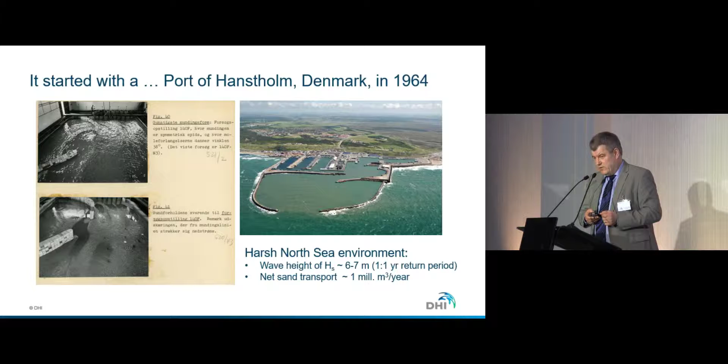I will start with a short introduction of DHI, a little bit on the principle we have been working along for quite some time, 2 interesting case stories, and what's next. Started with a port more than 50 years ago. DHI was asked to build a harbor in a location with a very harsh environment. Tough waves and a tough sediment climate. A lot of sediment is passing this part of the North Sea. We did a physical model of that, as you can see to the left here, to convince policymakers that this is doable. And it was built. And guess what? Now it's going to be extended again. This was the start of DHI.

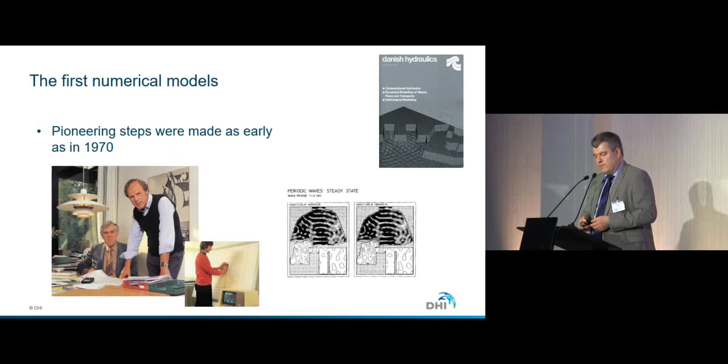Models. This is very much about models, following the first presentation. As I said before, DHI was established on physical models, but at a very early stage, some visionary people said that doing physical models is very expensive. We have to do a more smart way. And that was this guy here, Mike Abbott, who started as one of the pioneering in developing numerical models. That has been the starting point for the success of DHI making software for the modeling communities, where I know quite a few people here inside this room are using these models for many years.

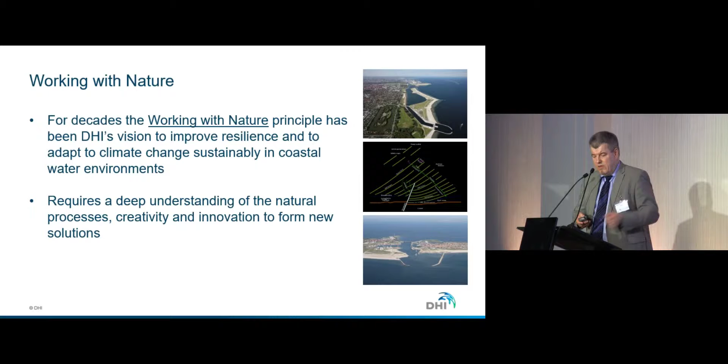At the same time, it's also important to emphasize working with nature has always been the principle for DHI in what we are doing in water environments, to improve resilience and to adapt to climate change. That requires a very deep understanding of the natural processes, a lot of math, numerical modeling, but also creativity and innovation. Models play a very important role today to find these solutions. With boundary conditions which are changing, we don't know the boundary conditions. So this is what we call the known unknown. But we have to come up with solutions.

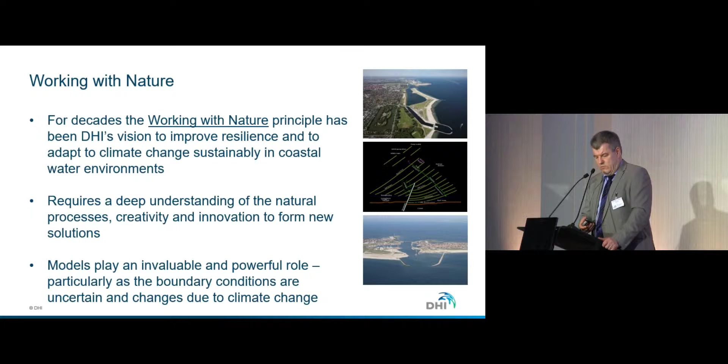I will take you back to Denmark. Limfjord is a 180-kilometer fjord connecting the North Sea to the inner Danish water. 150 years ago, it was closed here. But then a major storm from the North Sea came and breached the dike there. And since then, it has been open. It's no secret that a number of the port cities around this Limfjord are having increasing flooding issues, especially this part here. And then one of the questions was, is that due to sea level changes, or is it due to other features?

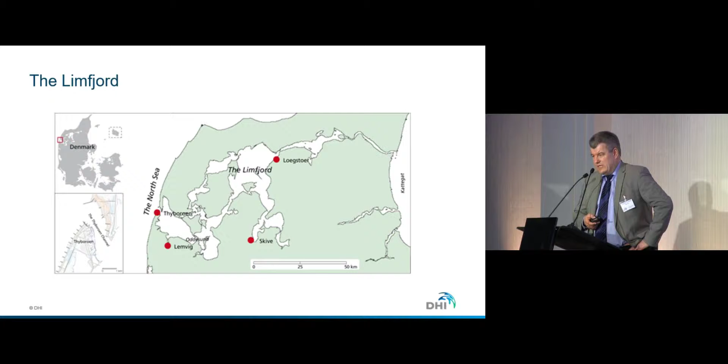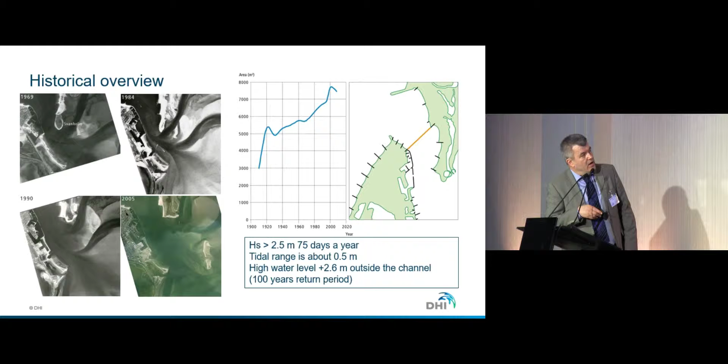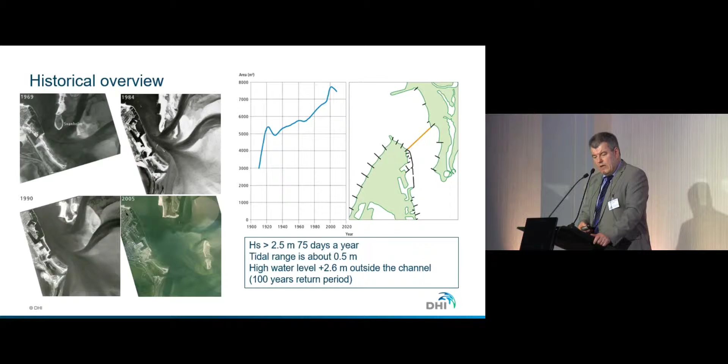This is actually the entrance to the inlet, and you can see a very rapid development of the morphology. And if you look over the past 50 years, it's easy to see how big changes you have in this inlet. And if you look at the cross-sectional area here, this is the area versus time, you can see more and more water is coming in, which is one of the reasons why we have increased flooding in this area. Here you can see this town we are looking at. So what to do to quantify this? First of all, you set up a hydrodynamic model and sediment transport model to study the quantification of the morphological changes.

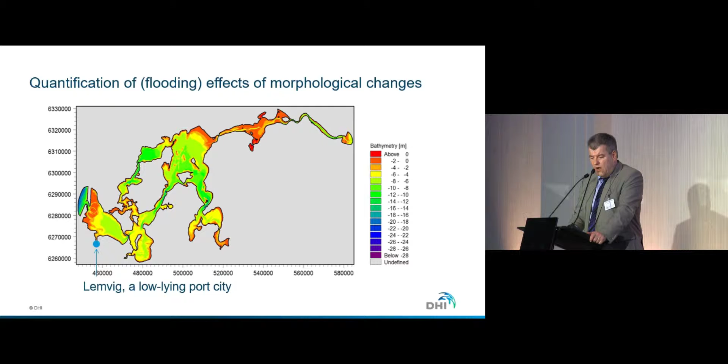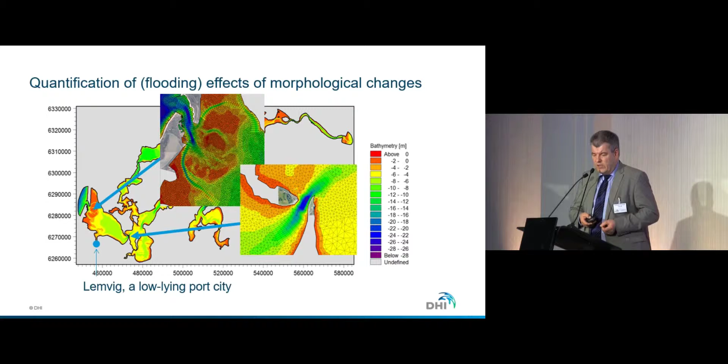And here you can see a couple of examples, snapshots of what we call high-resolution models, which are validated compared to measurements. And fortunately, we have many measurements in this area, so we can make a very robust model. Then we can run a number of scenarios. We can run historical storms. We can run scenarios in the future. But let's start with some of the historical storms and make the analysis. If you consider the condition as it is today, then you have a water level versus return period here. This is the present situation.

But if you extrapolate the morphological evolution into the future and do the same calculation with a number of historical storms, you see a picture like this one. And for the 100-year event, we see an increase of 40 centimeters in water level. Nothing to do with climate change, but due to morphological evolution. Without our models, it would have been impossible to assess.

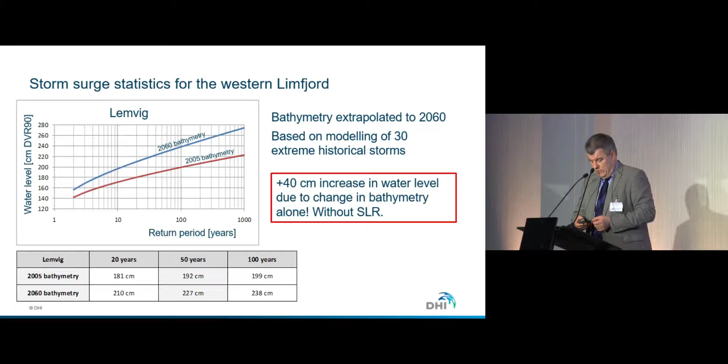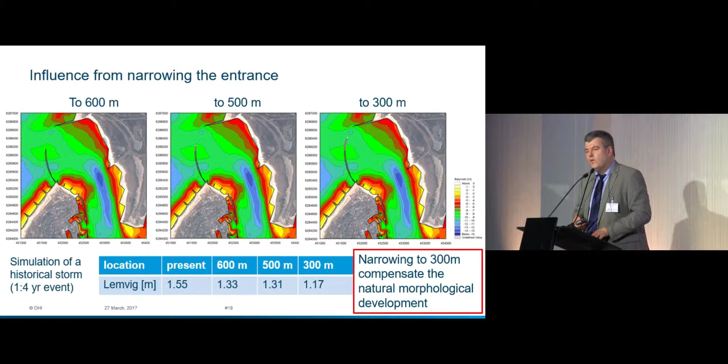As I just said, that morphological evolution is responsible for 40 centimeter increase. So we have to narrow it down to 300 meter with a solution like this one to get equilibrium. This is a solution that costs around 50 million euro. Alternative is, of course, making a barrier, which is probably 10 times more expensive.

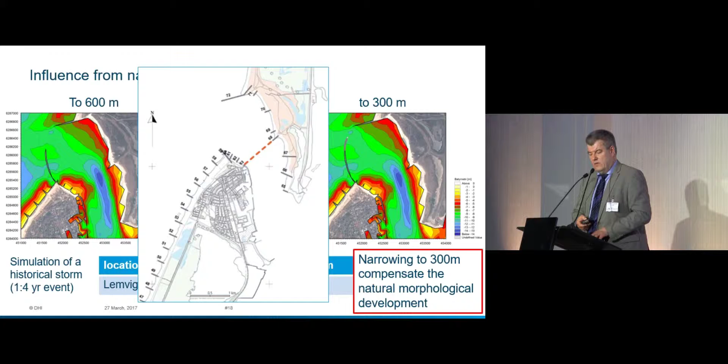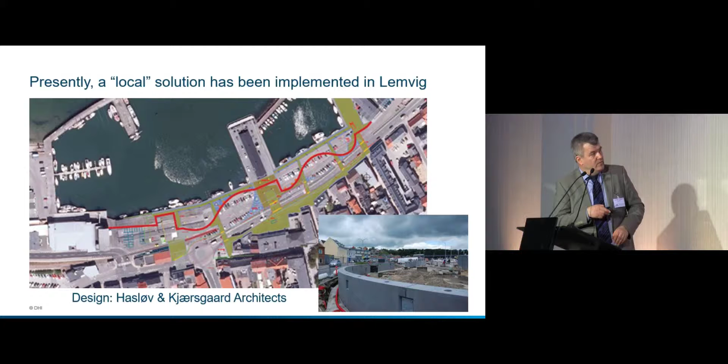Presently, a local solution was implemented in this city. They built a dike here in a smart way, and it works. As you can see on this picture, this is the port during a major storm. So that was a local solution embedded here.

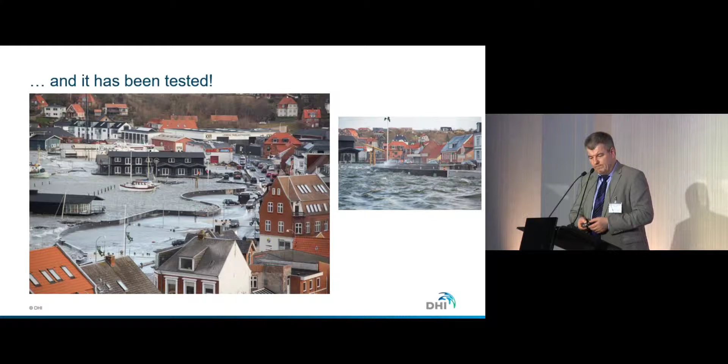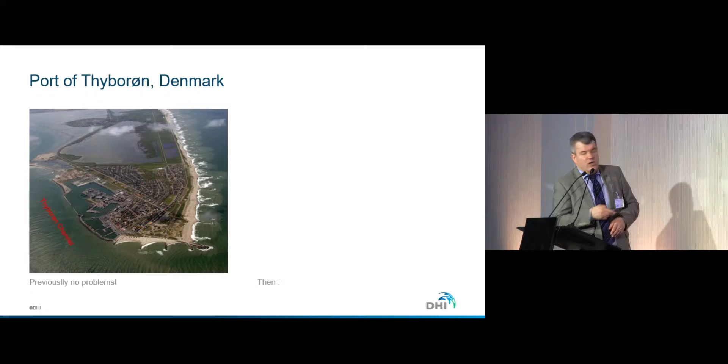Now the exercise is coming. Are you ready? We're back to the port here. A few years ago, there was no major issue with waves and overtopping waves. But then we saw this one. And this picture is actually taken here. The waves are running over here, quite violent, during a reasonably calm day.

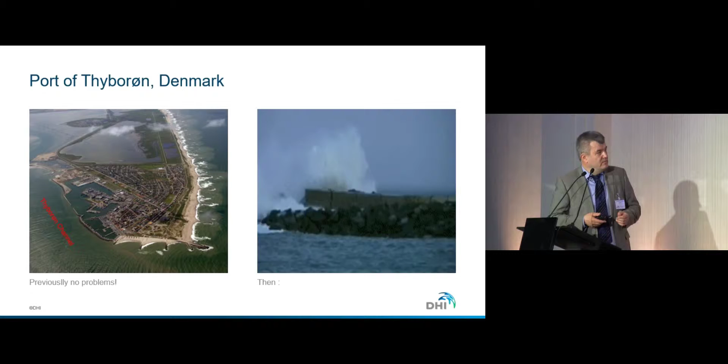Now the climate changes are coming. What is it? It was very unusual. I have never seen something like that. It caused a lot of disturbance inside the ports and, of course, damage on the structure itself. But what is the next step? What to look after to investigate this? What is the first thing you will do?

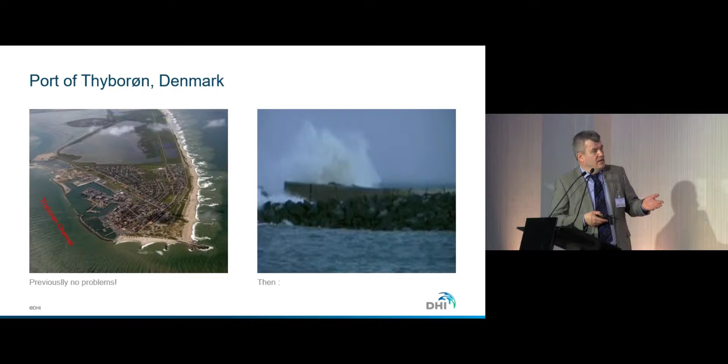Look at the bathymetry, right? We look at the previous survey, probably 1 month or 2 months old, or even older, and the new one. Subtract these two from each other. When I asked quite a few people, they said there are no differences. Yes, there are. There are differences.

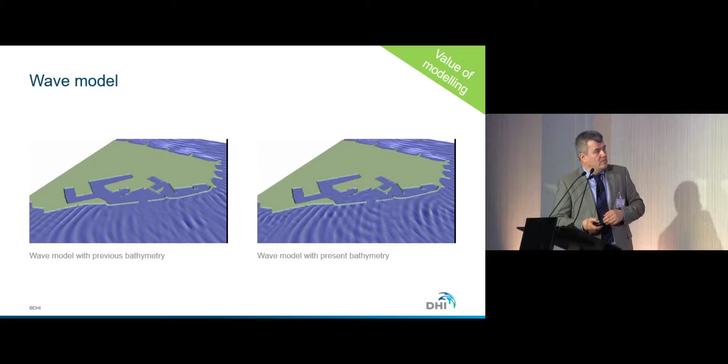But then you can use a model, one of the wave models. This is the area. That was the previous situation, that's the new situation. You can see much higher waves here than here. What's the reason? This one. The sandbar, small sandbar, causing a lot of trouble. Solution is easy. Remove it, and they did. Cheap solution, understand the nature, and do applicable models. That's the lesson learned here.

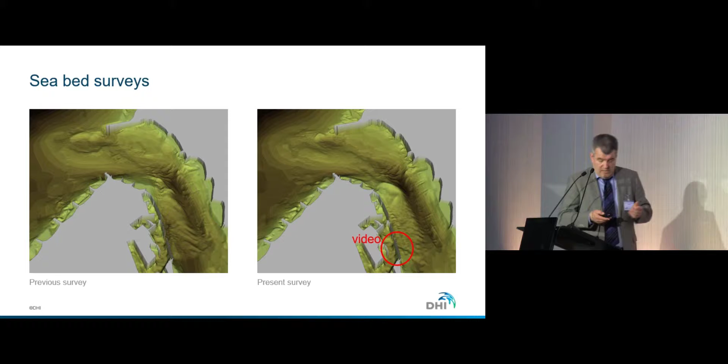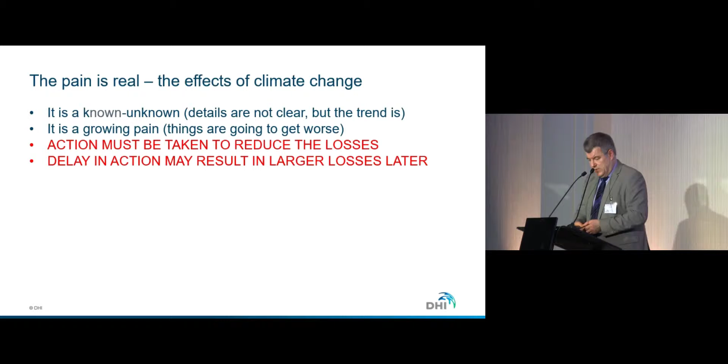What's next? One thing is that you can do a lot of modeling, and the pain is really real, as we discussed. We have a known unknown. The details are not clear yet. It's very uncertain. But the trend is it's going to get worse. So we have to take some actions to reduce the losses we see. Otherwise, it results in bigger losses in the future.

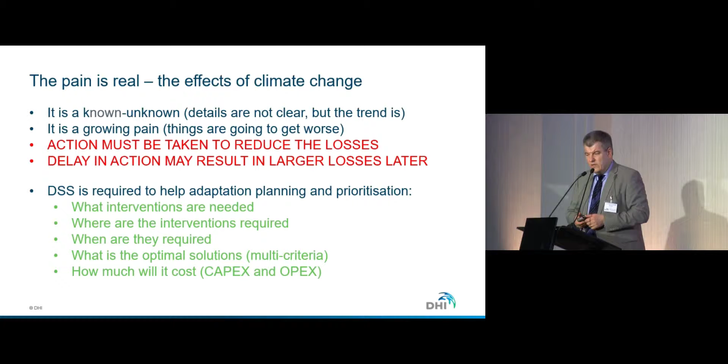And that calls for what we call decision support systems that can help in our planning and prioritization. What kind of interventions are needed? When are they needed? And where? What are the optimal solutions? Looking at a number of different criteria, and how much does it cost?

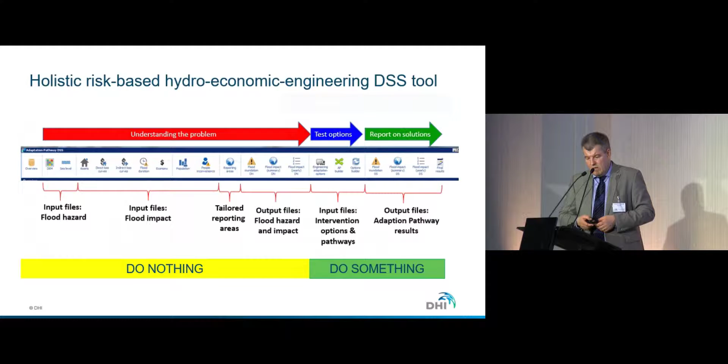And of course, the output is risk assessment for existing situations. But on top of that, also evaluate different kinds of intervention options. And eventually, that will help take the right decisions, we believe. So our vision, working on this tool, is offering a unique and easy-to-use GIS tool, combining water domain knowledge and AI-driven decision-making. The latter one is a new one for a water modeling company like DHI.

Therefore, we have invited a number of partners to work together with us on this. We believe this kind of tool will enable policy and decision makers to make these informed decisions in the context of a situation where we have unclear boundary conditions.

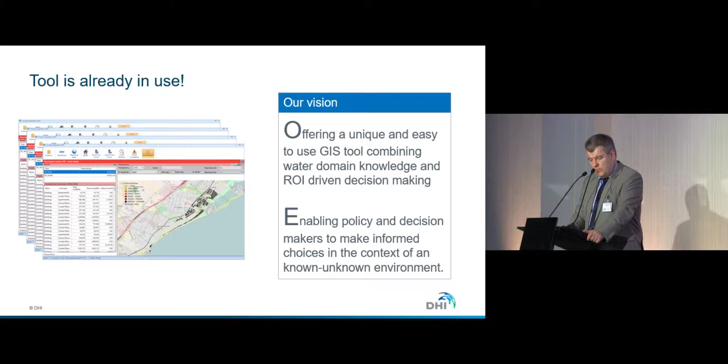And this is my end slide here. It's always a good idea to start with: what is the worst case envelope in a do-nothing scenario? What will happen? To set the scene. But then, as Adam also said, it's quite important that we are simply not going crazy with a number of different models, but use the right tools and the right data during the process.